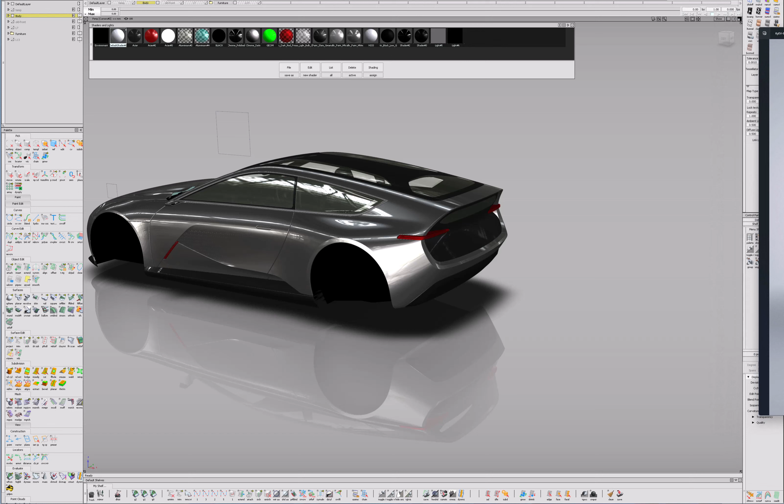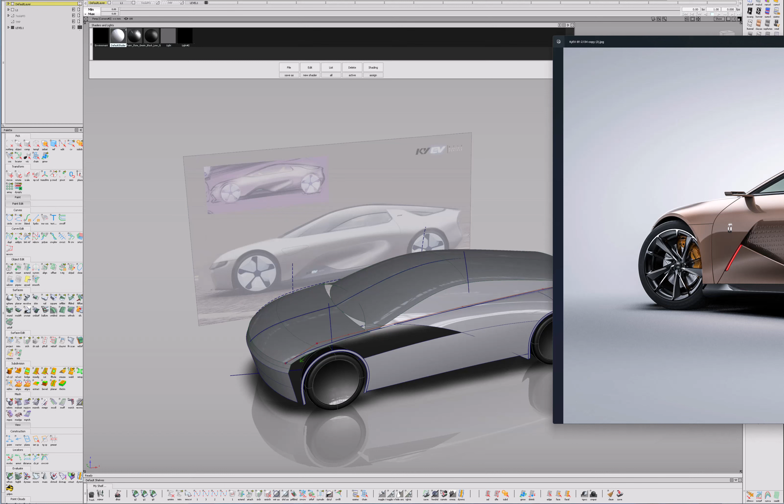Let me organize some stuff here.

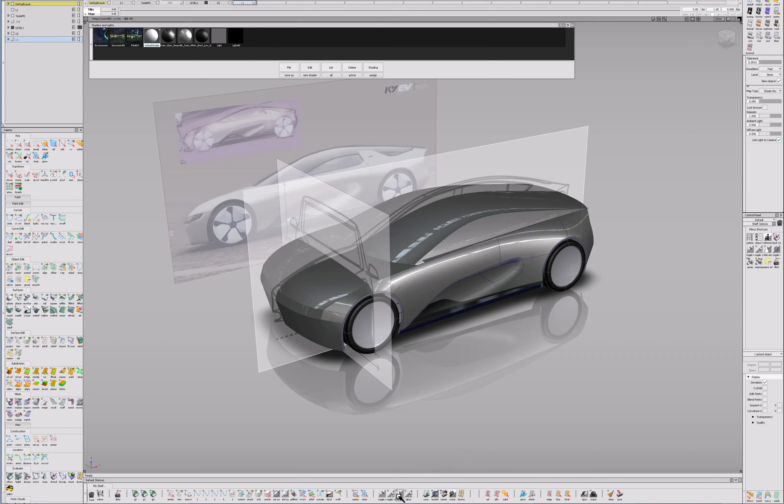Then, after this, a couple of steps to somehow catch the volume of this side and catch proportions. For proportions I just took the Tesla Model 3, I think it is, just for basic dimensions.

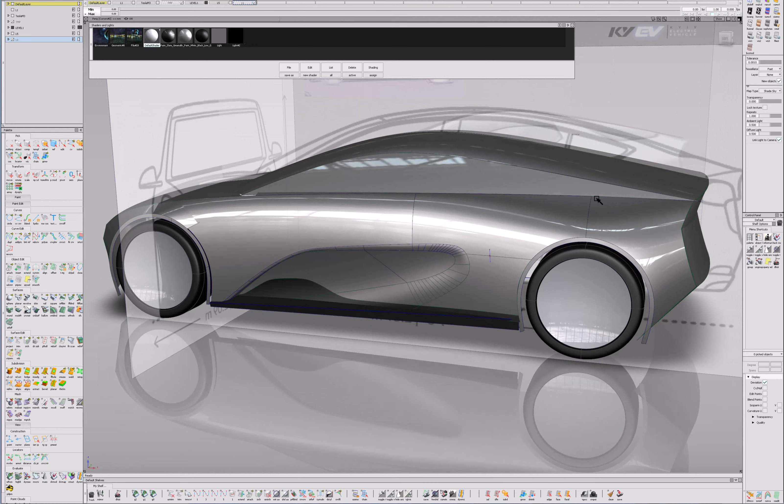Then I built this really rough volume, but as you can see, I tried to build up the highlights right away, to sculpt it even in this super simple form.

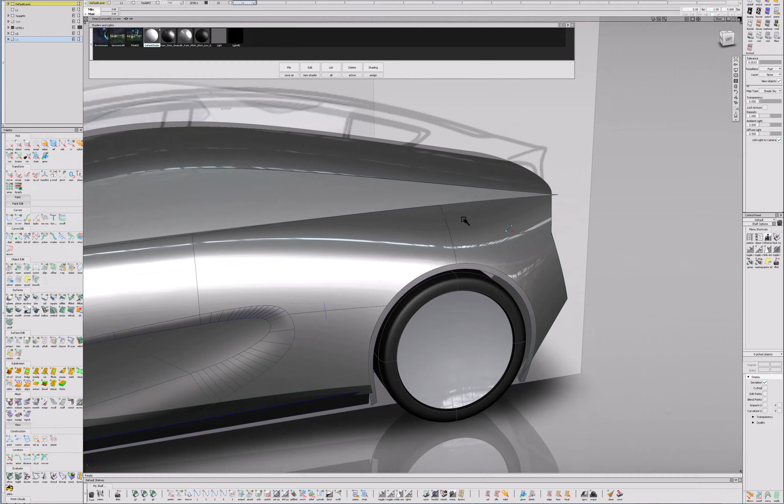This is my technique for this kind of really rough models. You don't need to build a lot on top of it to achieve this kind of volume, just sculpt CVs and the surface here, just to catch proportions and everything else.

Then we decided to change it to a more aggressive coupe look, and decided to use as a reference this Mazda concept.

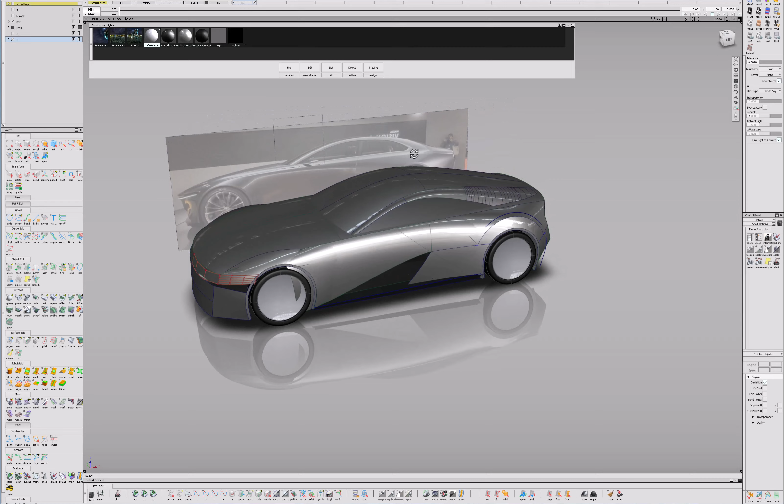As you can see, it had a different A-pillar touchdown and silhouette. The wheelbase stayed mostly the same because I scaled the reference photo to this wheelbase, but the A-pillar touchdown and the whole silhouette of the car was changed according to this sketch.

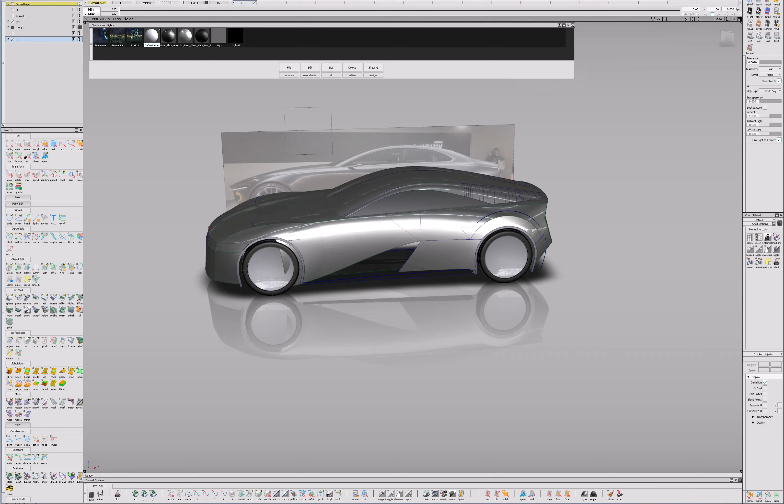Then there were small changes here, and I ended up with this model and sent it to our chat.

So at the beginning of this project there were three of us: Anton, who lived in Kiev at the time, Max Shkinder, who lived in London, and me, who lived in Zagreb, Croatia.

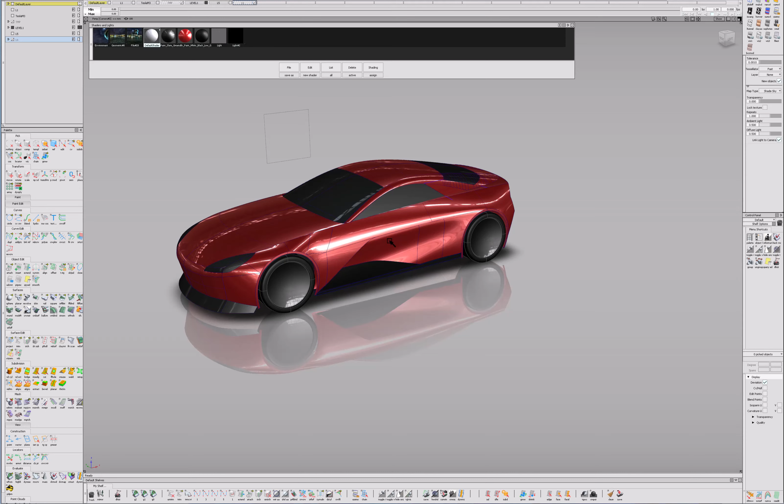When I ended up with this model, I sent it in our chat, and Anton and Max did a sketch on top of it.

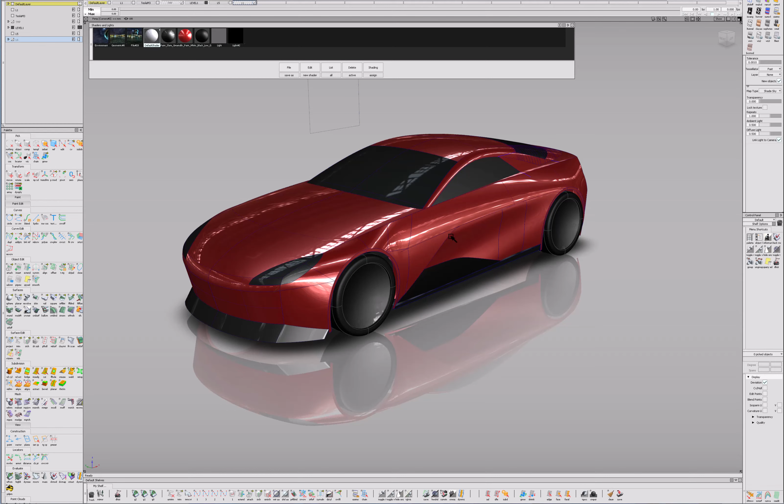You should understand, especially if you're new to this design process, that it's never one iteration. It's always so many tries - I wouldn't say errors, but so many tries - when you can see what's working and what doesn't, and you choose the best solution. It's never from the first touch, never.

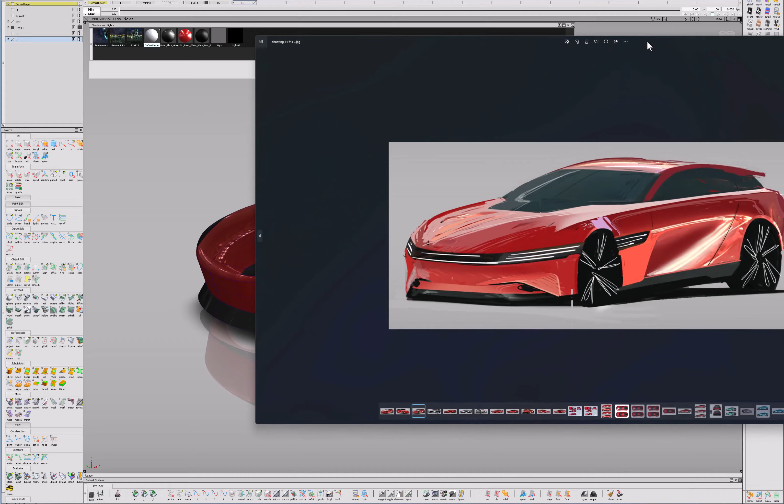Anton, on top of this one, did a lot of sketches. We took some ideas from these sketches, but basically this one we chose as the main theme.

It was done by Max. All this, as you can see by style, was done by Anton, and this one was done by Max Shkinder. This is, as you can see, my model.

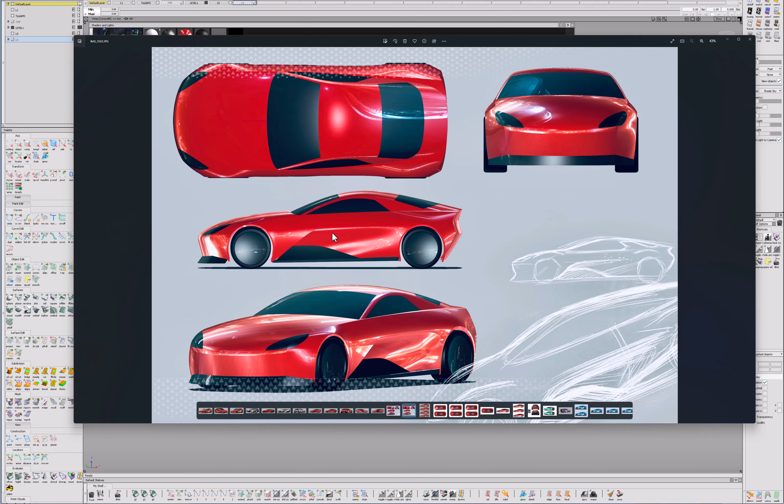This is the sketch. The task of this sketch is not only to show the design, as you can see here, but also to create it in orthographic views for me, for the modeler, so I can easily build my model on top of this.

So I can use it as a reference, as a blueprint, put it in Alias, and use it to sculpt and model. This is really a professional level of sketching.

Because really often when you communicate with a designer and expect some feedback, the designer might give you a sketch in perspective like this, without any orthographic views or lines or anything. And it's really hard to catch the right proportions or volume from perspective.

But when you get this kind of sketches, it's much easier. So we accepted this one as the main theme. We liked it a lot, all of us.

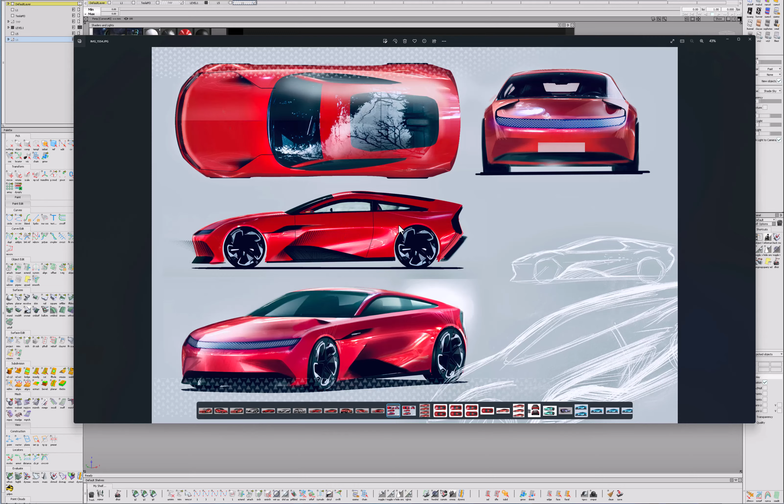All decisions were made by voting. There were three of us, so it was never even - it was easy to choose. We voted for this one and continued with this guy.

So this is the first tries to implement this sketch here.

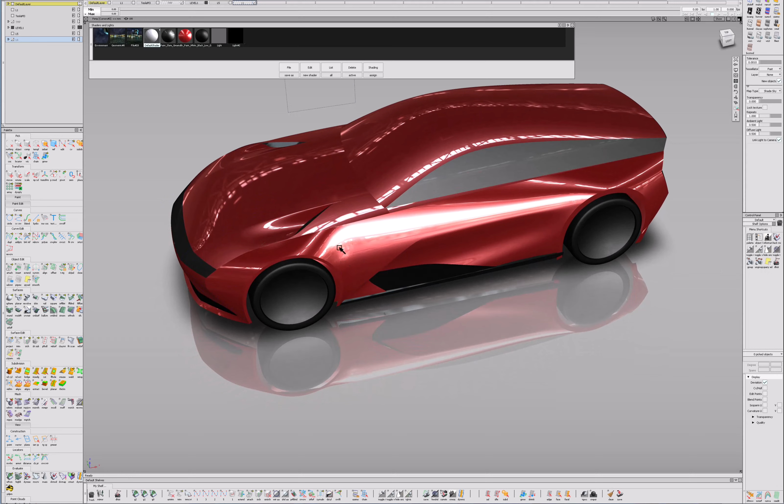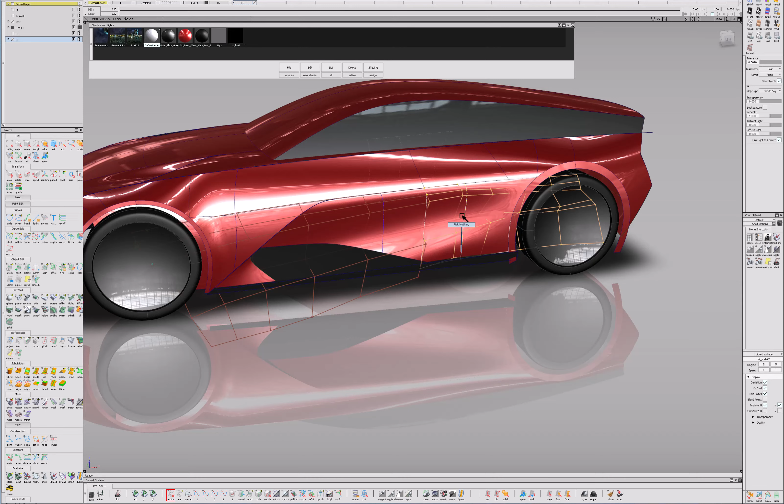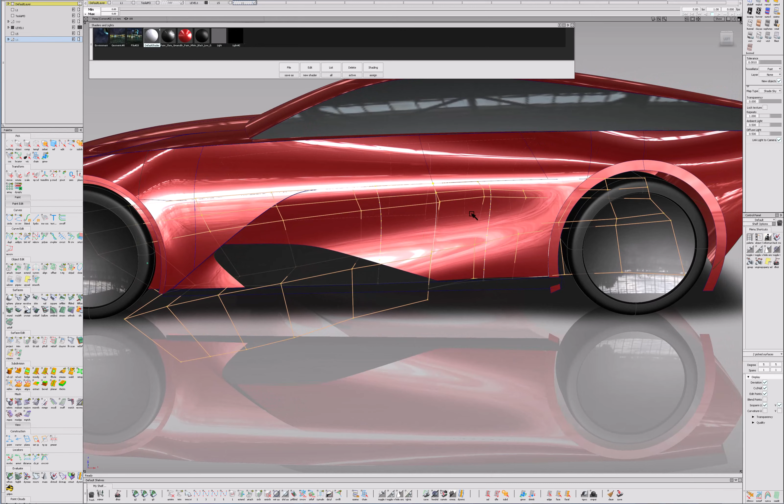I tried to build basic volumes, basic surfaces to blend up, to blend the wheel arches, to catch highlights. How I did this one, you can see it was pure sculpting. This is the blend between two surfaces. First one is simple, to align with wheel arch here. Try to catch this line by intersection, not by naked natural edge projection, but by intersection. And this crazy volume, basically, you see how I did it, just pure sculpting. Then after this, I did a lot of trim convert actions to clean it, to sculpt it back into one clean surface.

So as you can see at the end, here for example, at the very end, there are only two clean, nice surfaces without any blend, so they have curvature continuity between each other, and the touches on the wheel arch are really good.

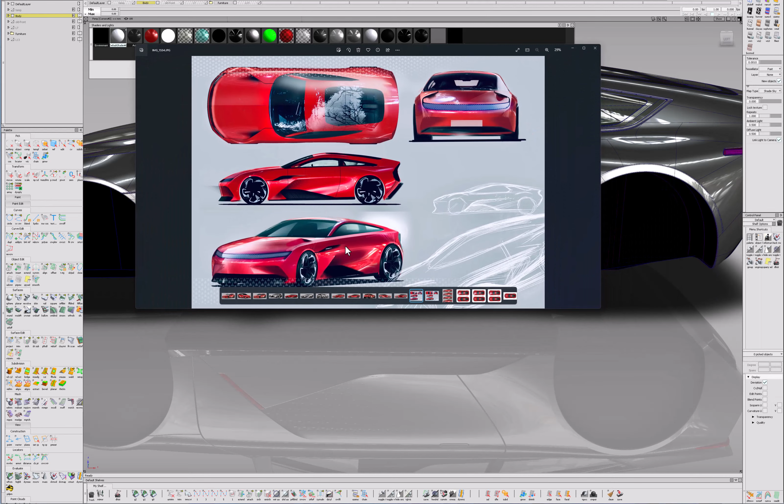Okay, we can go here. Next, we discuss a lot of things regarding the roof, as you can see, regarding C-pillar. There was a lot of discussion regarding taillights. You will see it later.

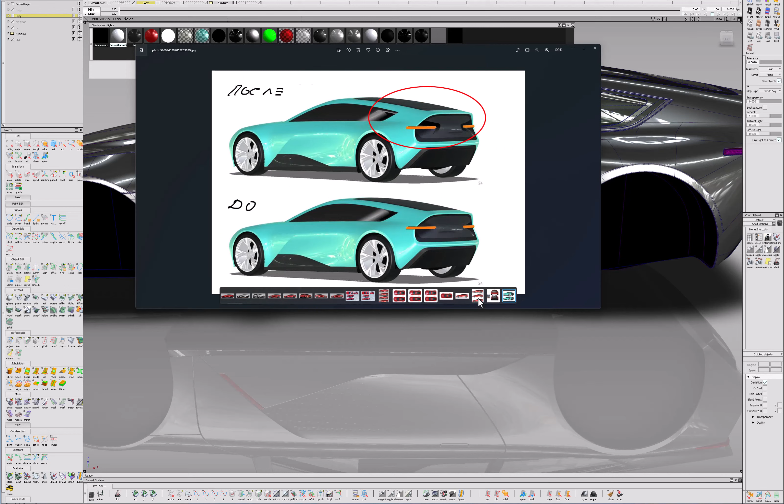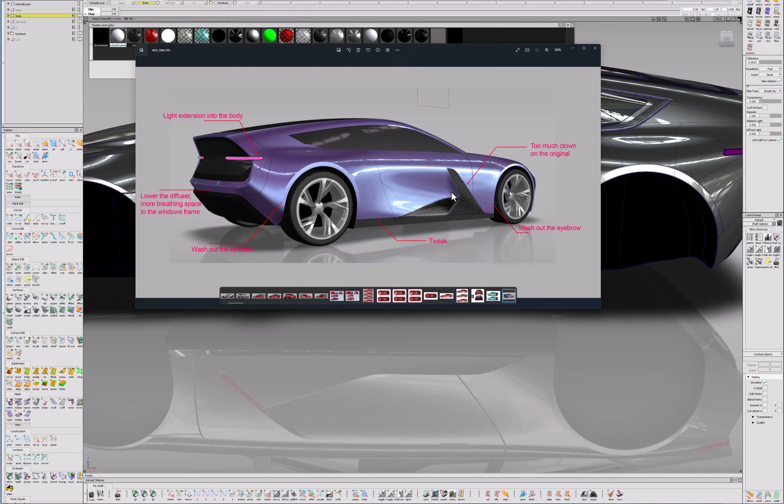Regarding the side, that was the biggest discussion, was regarding the side. We tried a lot of stuff, and it was very hard to model something fresh, something unique. There are so many cars out there with different volumes on the side, and everything obvious, it was done by someone already. So we tried a lot to catch something unusual and fresh and interesting, and something that will work here.

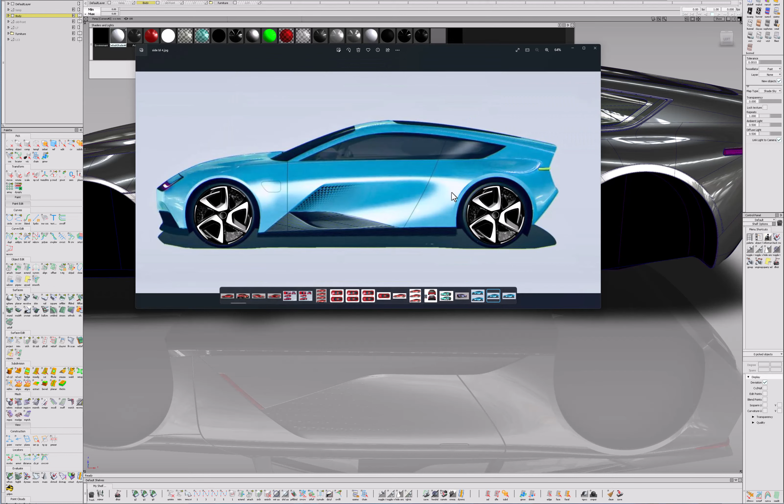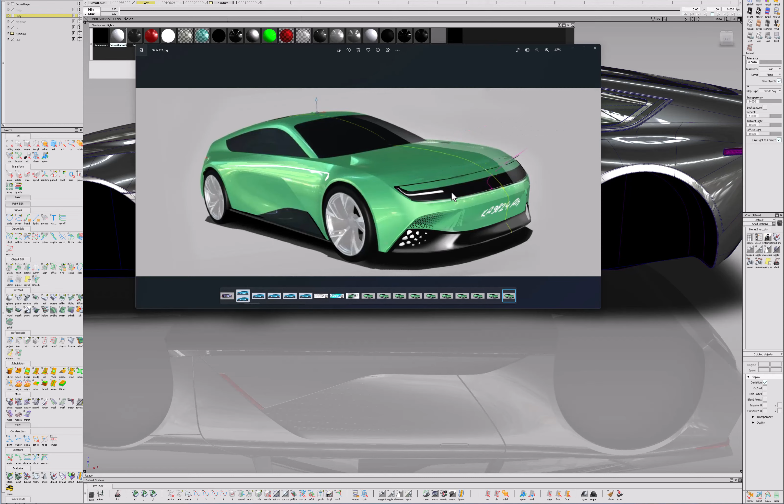So this is actually wheel disc iterations. This is concept for front light graphic. You see how many things we tried here before we start to model, and yeah, there's many cool things here.

More disc iterations. Okay, for discs, just to keep the model on the ground and to see stance and everything, usually I am downloading some basic stuff from GrabCAD and using it. I have not modeled these discs for the first time, but later, of course, when we finish the model and for final renders, of course we should make the original discs.

We did a lot of iterations on this, and finally we end up with what we have here. This was one of our tries, and we end up with this one, as you can see.

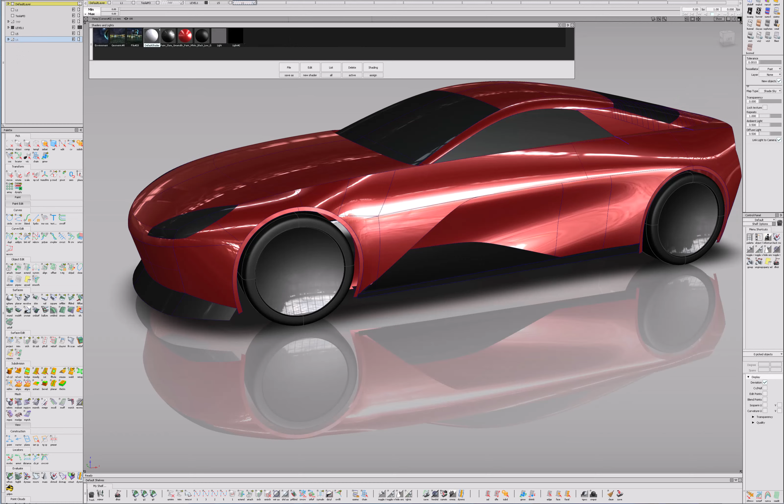And the whole time, this is my, how to say, not technique, but I love to do this when we're developing the project. I'm always changing the colors in Alias, always, as you can see. It's easy to see this, that every time the colors are different. It's because I like to feel and to see which colors suit this car more.

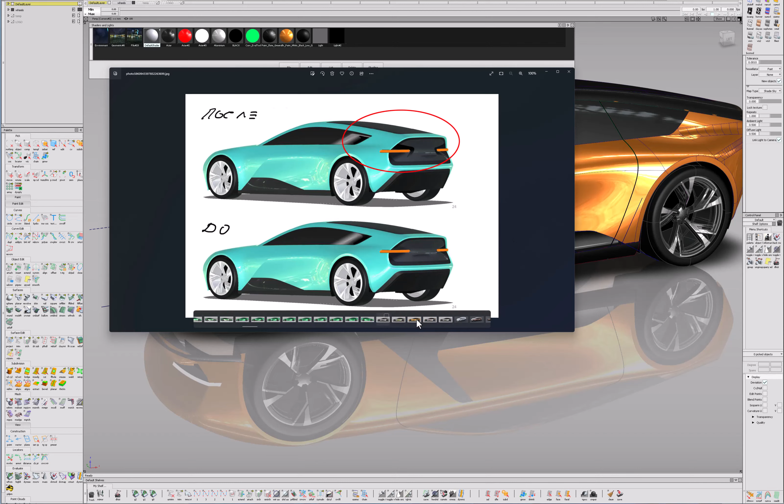And you can see from these renders also that I tried a lot. Let me show you. So it was gray, yellow, this bluish one. I like this one a lot also. I used it on my BMW.

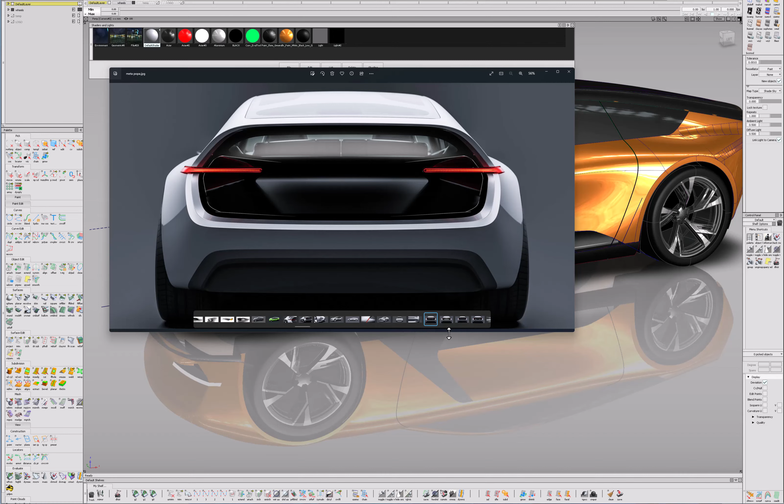And it's really hard, especially when you're doing post-production in Photoshop. With only one slide, you can ruin your color on the paint. I mean, not ruin, but change it. So, for example, this violet color—only a small slide in Photoshop changes it to blue or black or something. So what's hard is to be consistent, to keep it from render to render.

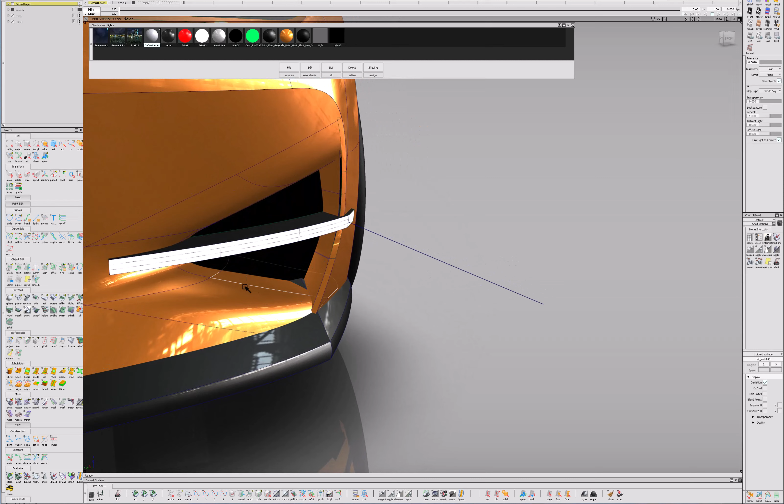So this is different front light variations and front bumper designs, and at the end we end up with this one. The hardest thing with this bumper was this transition from these guys to this edge, and from this big soft fillet, big soft volume, to this edge, from a modeling point of view. It was not hard from a design point of view, of course.

And what else? The crazy stuff was with this pattern. We tried a lot. We got rid of a lot of ideas just at the ideation stage, because no one knew how to implement this in 3D. And this is how the discussion was going.

And yeah, we tried a lot, and one of the options that we did with the pattern was, let me show you. Let me find this picture. So many of them.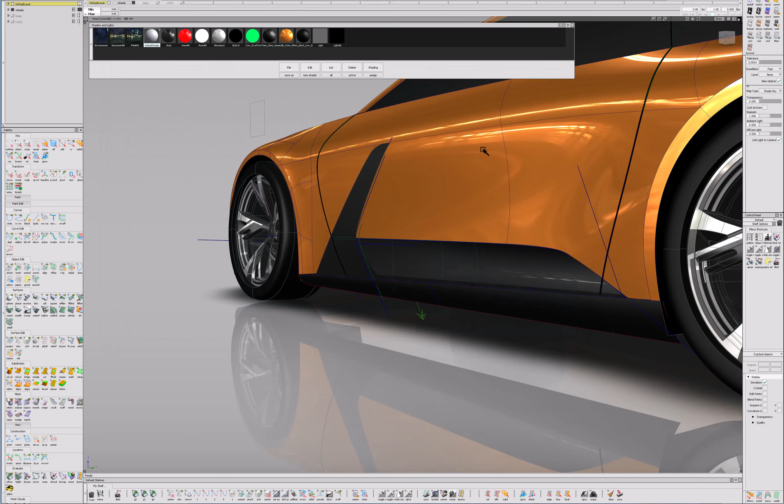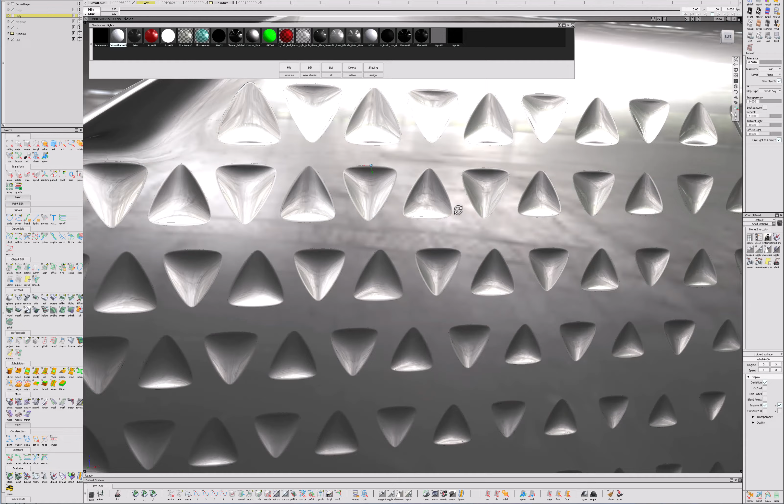And I came up with the idea—of course it was me, who else—with this treatment when it's not just a basic cutout or Boolean operation or extrusion, and it's actually a triangular shape of the surface that intersects with this triangle on the surface. So it creates this nice pattern here.

So I can quickly show you how I did this. Let me open the RHINO file. One second.

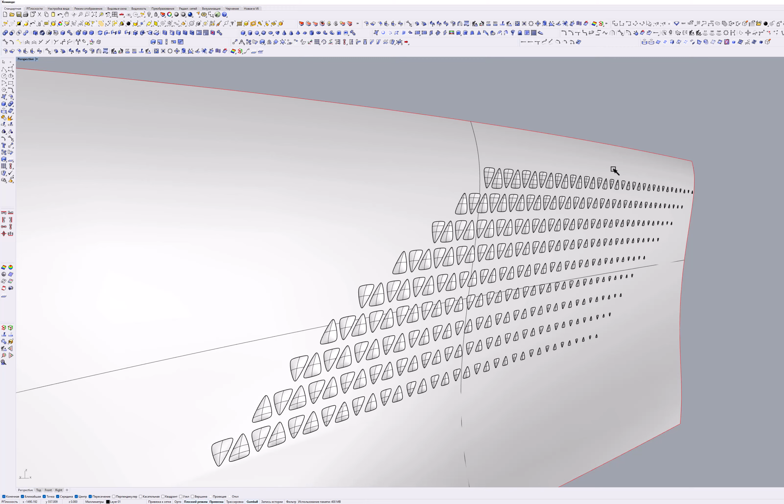So it was done in RHINO, because RHINO works really well with this kind of operations. The surface itself, the pattern, was done in Alias. Then I bring it here.

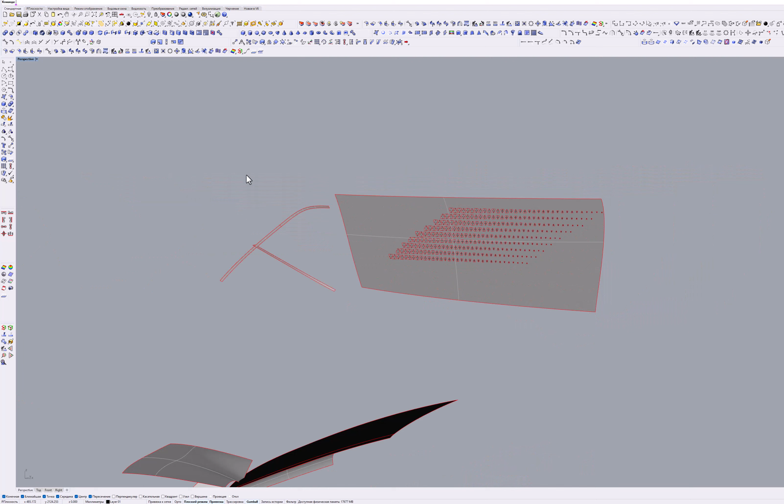I did it on a flat surface with this reference. See, this is our body side, this is our character line, and on top of it we have our pattern.

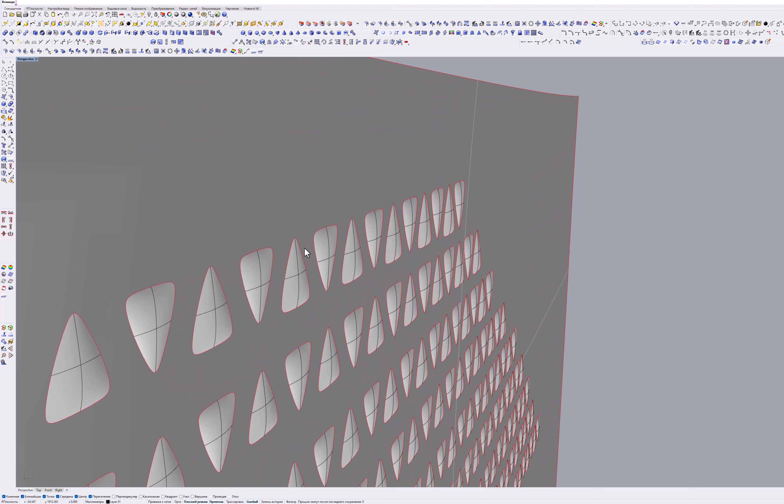So I did all these triangles and intersected them with the surface, trimmed them all on the flat surface first. This way I have more precision and a more controllable environment for my pattern.

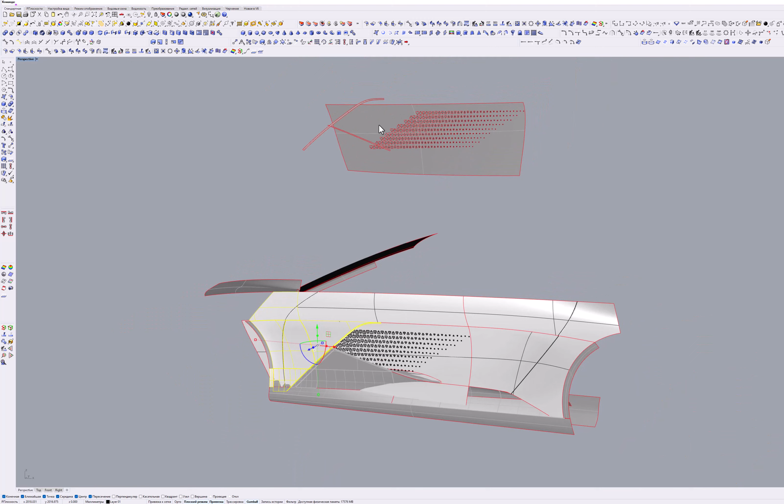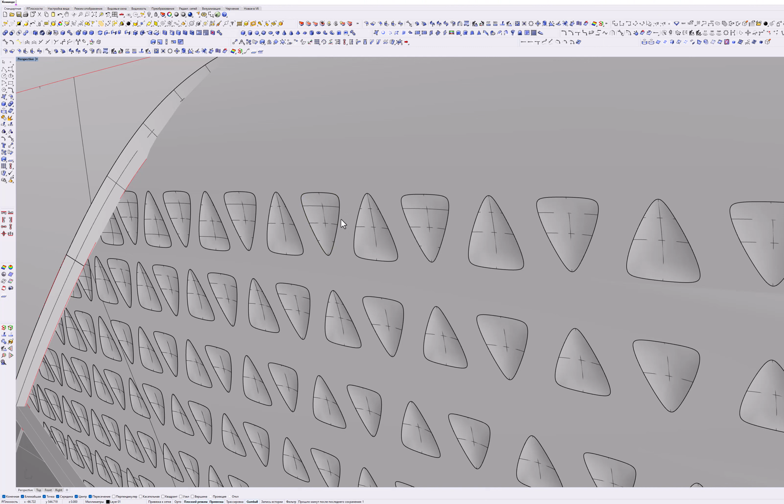And then I use this Flow tool to translate all these triangles to this bent surface, and it picks up all the coordinates from this surface and translates it here. As you can see, it adds spans here just to increase resolution of this surface to fit properly. So at the end you have really good tolerance here, and you can work later on putting in radius here or something else. See, you can go even more.

RHINO is really good with this kind of stuff, but not Alias, unfortunately, or I just don't know how to do it there. So yeah, this was done in RHINO, and it was done in a few stages.

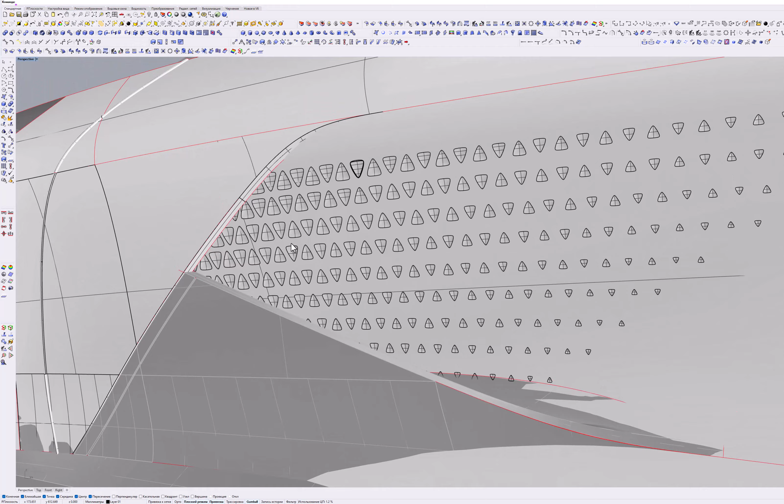This one was the first. Then I add the fillets here and here, and it was the second iteration to adapt this pattern to avoid this blend surface that goes inside there. So then it was remodeled again, and here also, as soon as I create these blends here, I had to remodel everything there.

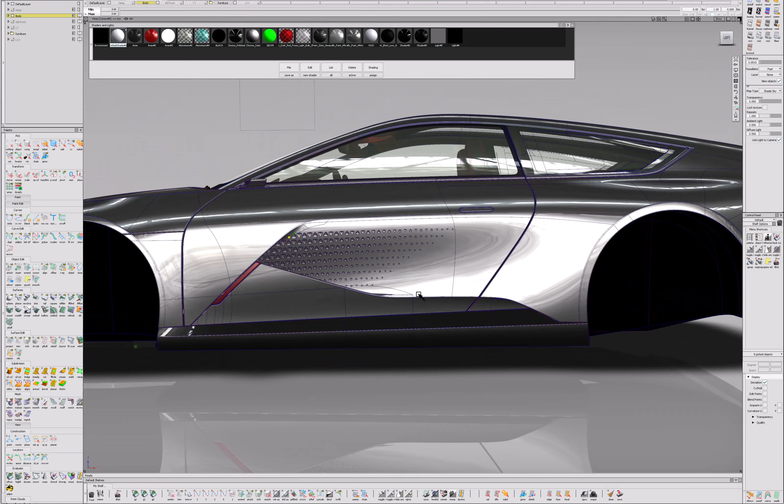Let's go maybe to the front. So we tried to put a pattern on the front also. This is how it looks. Let me show you quickly. We tried a lot of things there.

This was done in RHINO also, because to try this just on sketch, you will never understand how it works. I did these tries in RHINO. We tried to balance it with the volumes, this what we had, and nothing worked here. We tried different things, nothing worked, so we decided to keep it just a black thing with texture.

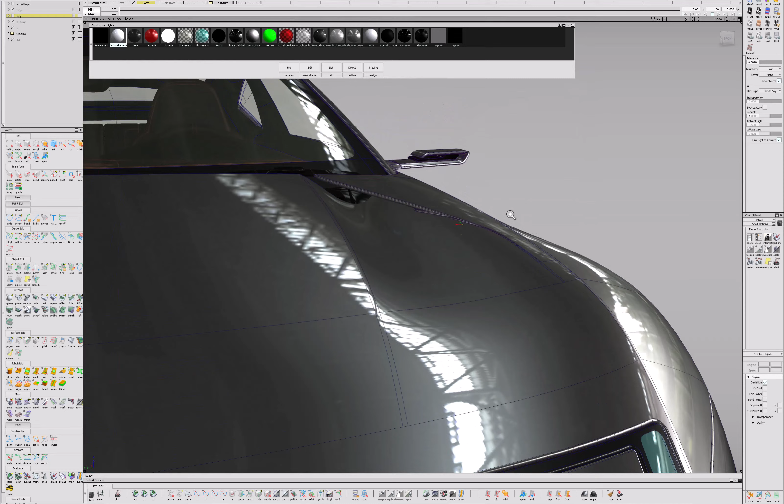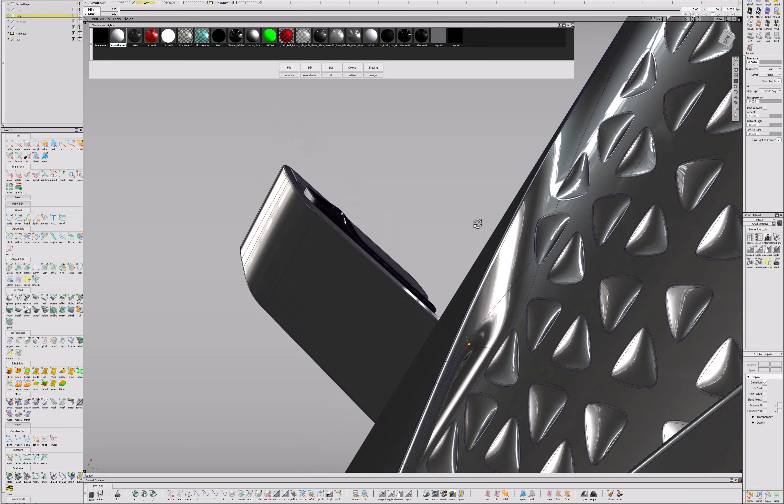What else was interesting here? Actually this one is interesting from my perspective, because it's not interesting, it was my lazy job here. There was a few ways to model this transition here. One way was, let's say, the right way, and hard at the same time, to make this nice, soft, clean transition that goes under there.

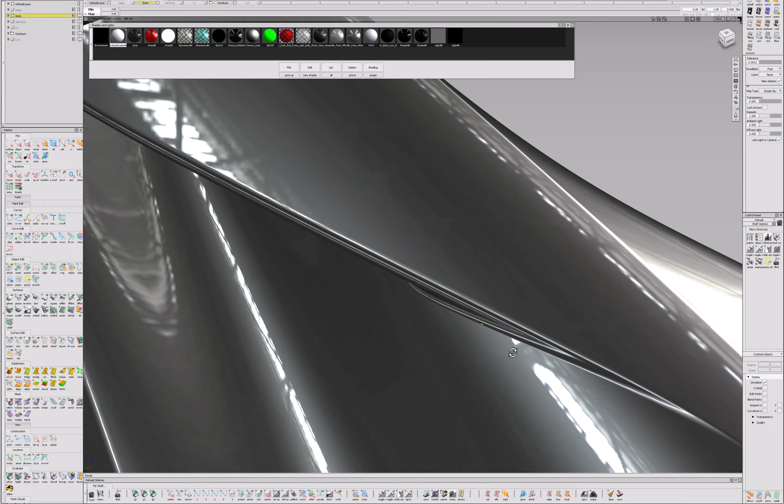And another one, the easy one, I just put this in CATIA, make this thickness here, and create radius there. It's so easy doing this, and it's even not curvature, it's tangent, but you will never notice it, because here I add curvature already. Here it's tangent, and somewhere here I have a transition to curvature, and it looks really nice, especially on renders.

Regarding the highlights here, I always try to keep in mind that it's not only lines, creases and silhouettes that should work as a design here. It's always volumes and highlights also.

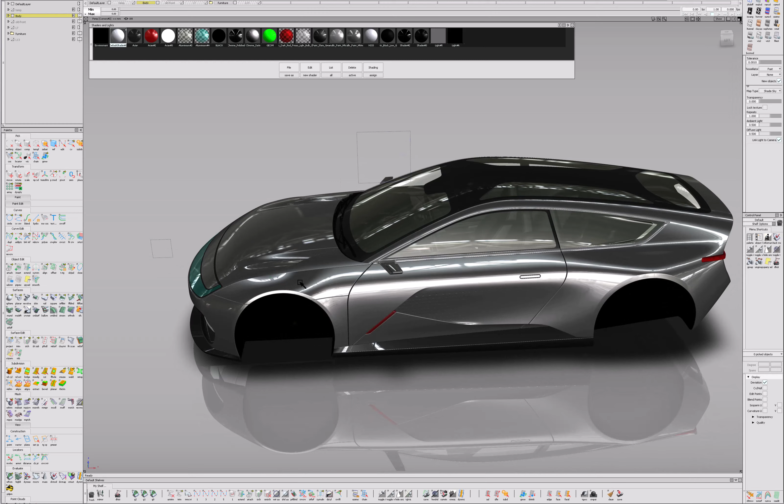So as you can see, the first iterations of the model, the highlights not following the edges of the shoulder. It really works good on the side crease, on the side character line, this volume, but not with the shoulder.

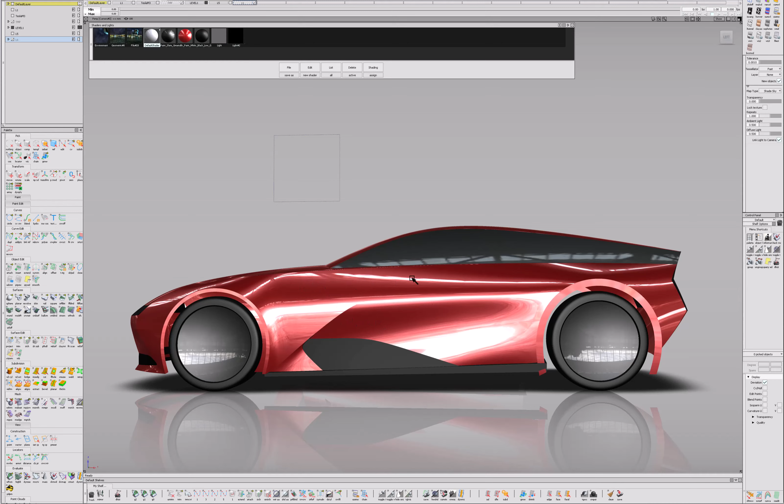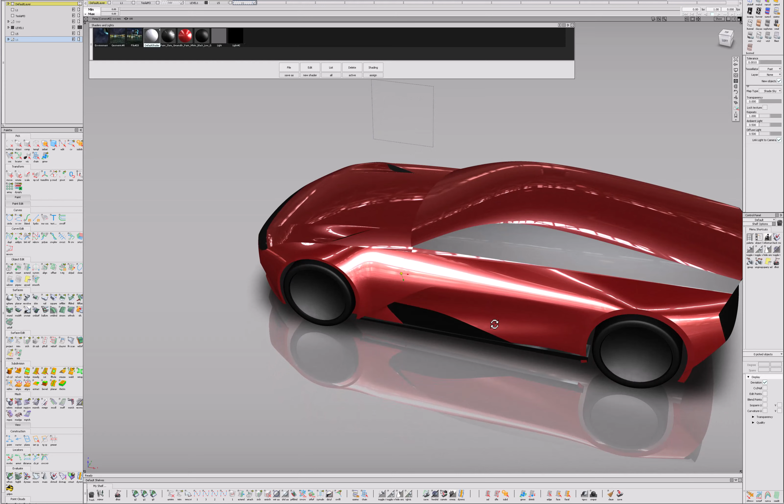And this volume, we used it a long time, and we thought it's okay like it is, and something was not okay. Only later I understood that all highlights here should follow the main lines, the character line, the shoulder line, the side line also.

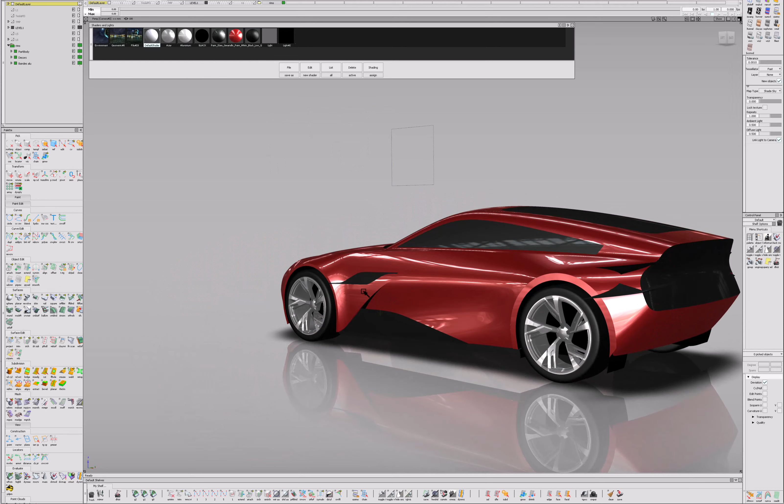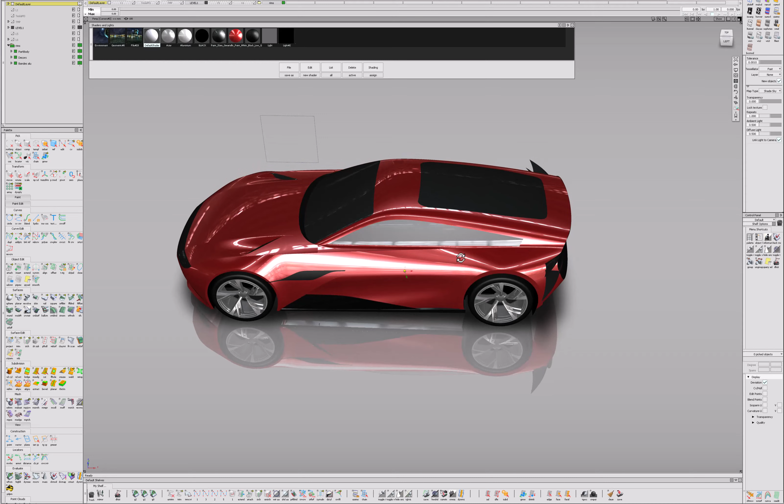And I ended up with this, you see, when we add more definition to the side, more of these tricky volumes here, somehow this good transition with the wheel arch, nice and clean, somehow your laziness tells you it's okay to keep it. More or less the side surface is good, it's clean, the highlight is straight, it's not waving, not waving anywhere, so you can keep it.

But at the end I decided to fix it, and you see I received at the time the corrections from Anton, who changed the silhouettes, who changed the section of the rear, etc., etc.

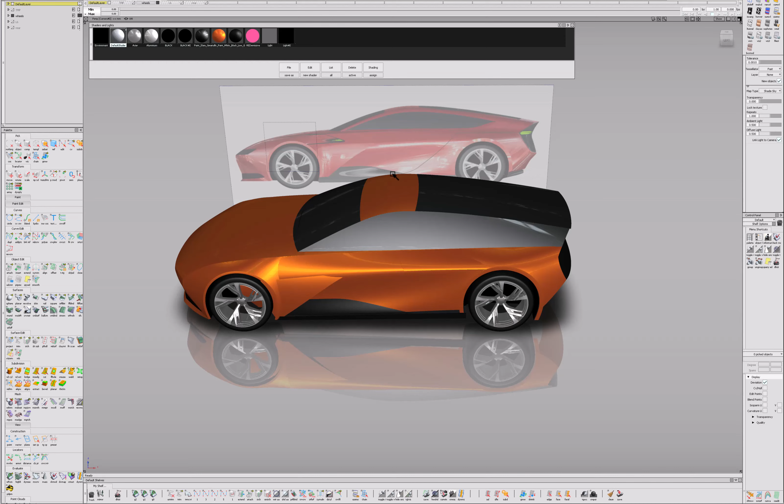So I should remodel it anyway, and I decided to straighten these highlights. And as you can see, because of this, I lose some speed of the highlights here on the rear wheel arch.

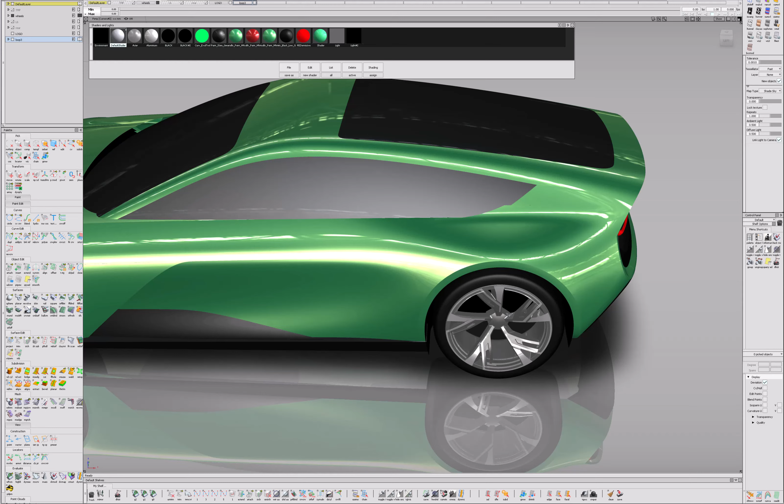It's always a question of how good you are controlling your volumes. Can you change it to what you want? And I wanted to change the speed of the highlight to make it more fast, to make this point more sharp. So at the end, as you can see, we end up with a highlight that is faster than the previous one.

And in modeling, you always have areas where you can't control it fully, and then it's a matter of the designer or design to dictate how it should work. Should this highlight be fast, or should it be slow? How should it behave? And sometimes some areas you really can't control, and it's not only volume with highlights, but sometimes you just have an engineering package that you should avoid, and you have nothing to propose in this situation.

So yeah, and sometimes I had a lot of, not a lot, but a few cases when my laziness and my stubbornness, let's say, kept me from seeing that it's actually possible.

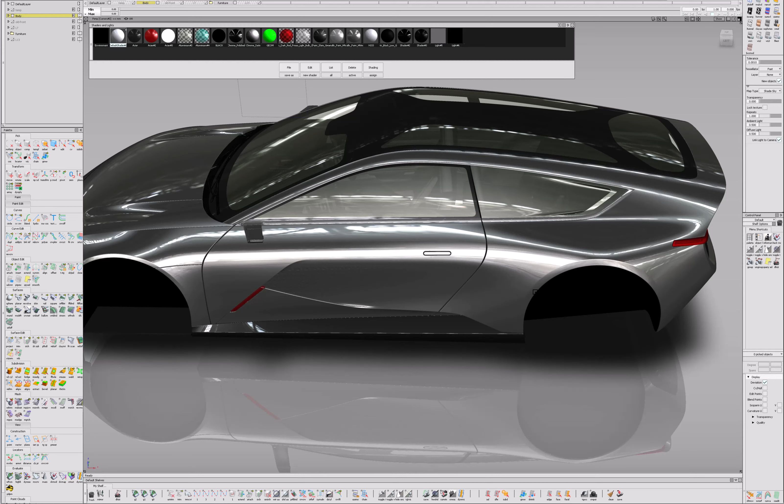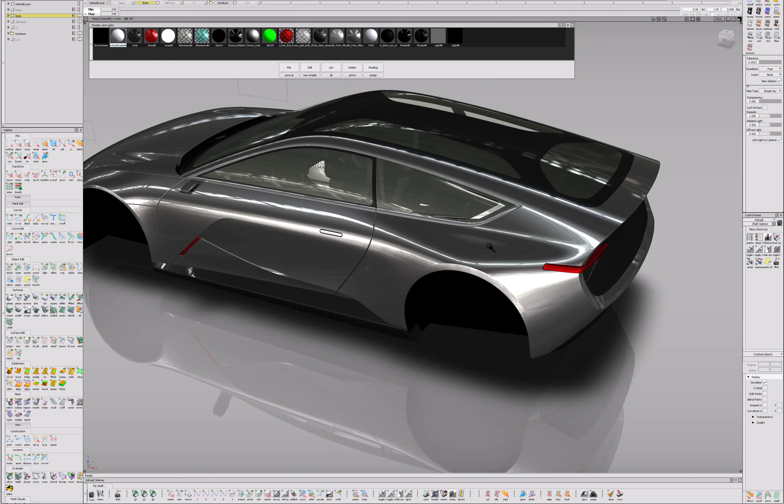Okay, so one thing I mentioned is that the highlight on the rear wheel arch should also have design in it. It should be under your control. This highlight should behave as you want, not just happen because you put a blend in it and it's like it is. You should sculpt it until you achieve the highlight that you want.

And my personal view on this, I like symmetry along the axis of the wheel, when the highlight goes into the wheel arch and goes out with symmetry. You can see this triangle here. Here it's different, just because of the volume, and here I didn't achieve this speed.

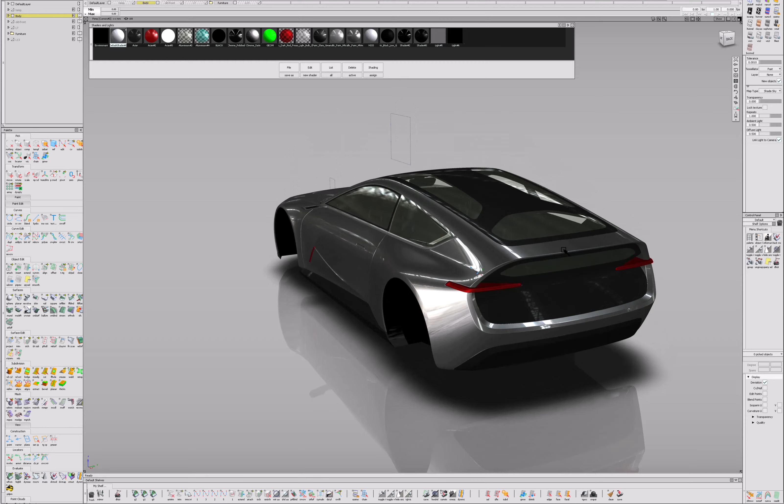And yeah, this is the biggest question I'm asking myself: should I have made this highlight speedy also or not? I like this one, how it works now, but I think I can make it faster and faster like this. And I'm always asking myself, should I have done this before? But anyway, yeah.

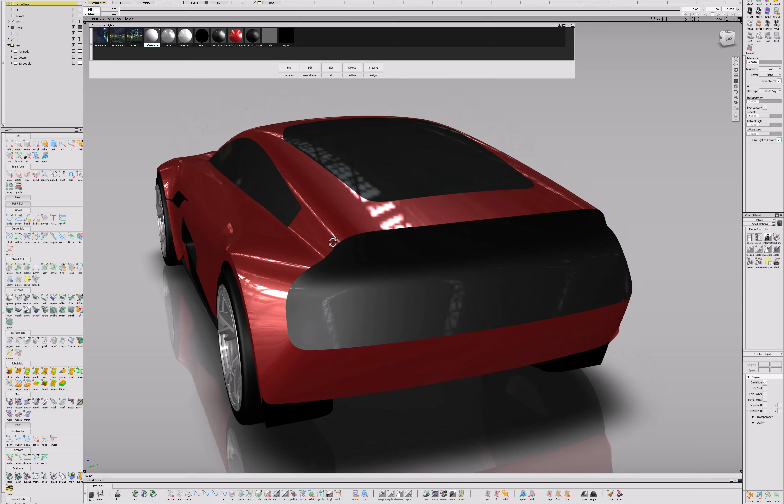And one more thing here is this silhouette, this edge of the rear. So as you can see, before it was obvious that the shoulder and the rear wheel arch has its own volume, and the C-pillar has its volume with the roof, and the transition from the C-pillar to the rear wheel arch has this negative surface.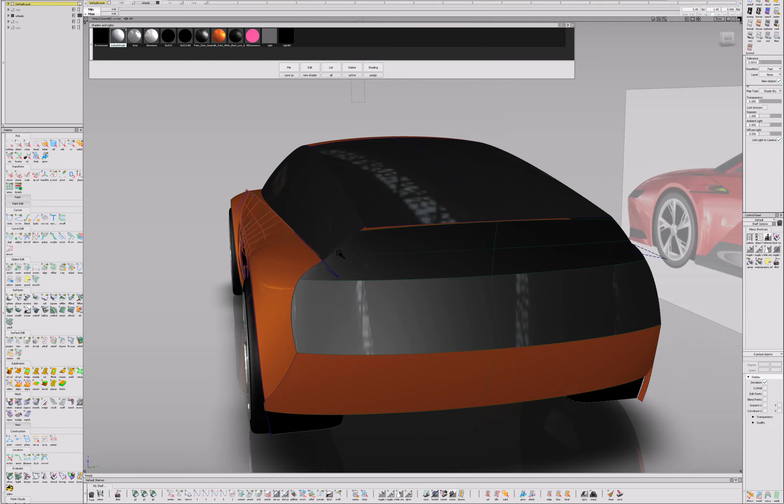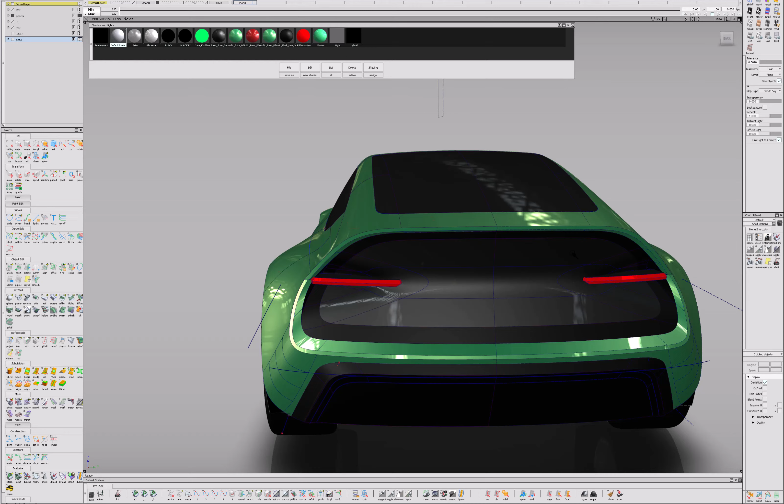Okay, let me show you more images. I will quickly show you the wheels, and all these iterations we did, we tried, we discussed.

Wheels are almost always not as interesting as the car itself, but you always need to do the wheels also. Somehow it's a must do. Only on some projects can you take, like if you model, for example, some Porsche, you can take a Porsche disc and don't bother with it.

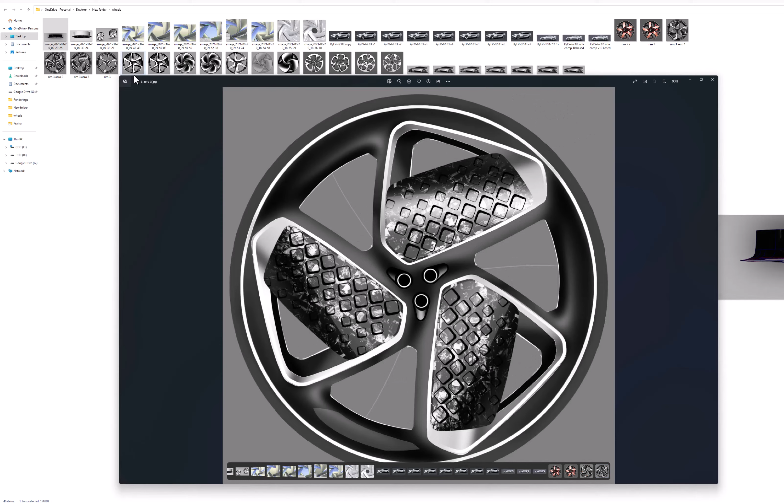So there were so many design proposals done just to find some cool solutions here. What else? Tail light. There were a few designs, and we ended up with this.

We end up with this solution, but also try to define it even more, not just a simple line, simple curve, or simple surface. And yeah, rear lights was done in Rhino also.

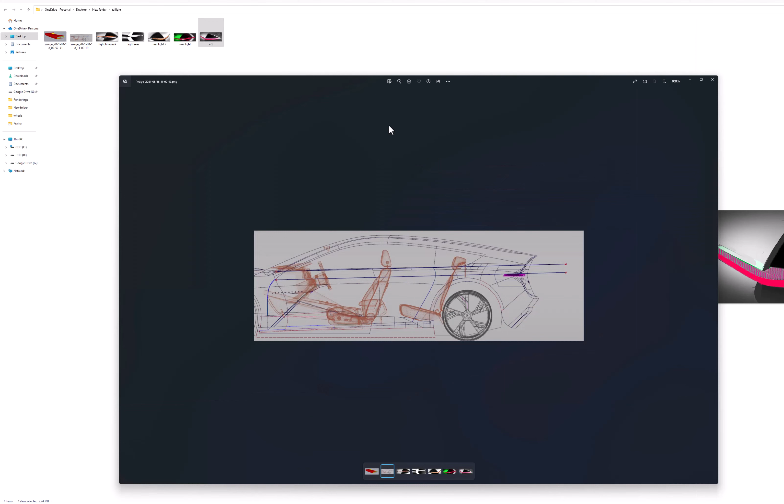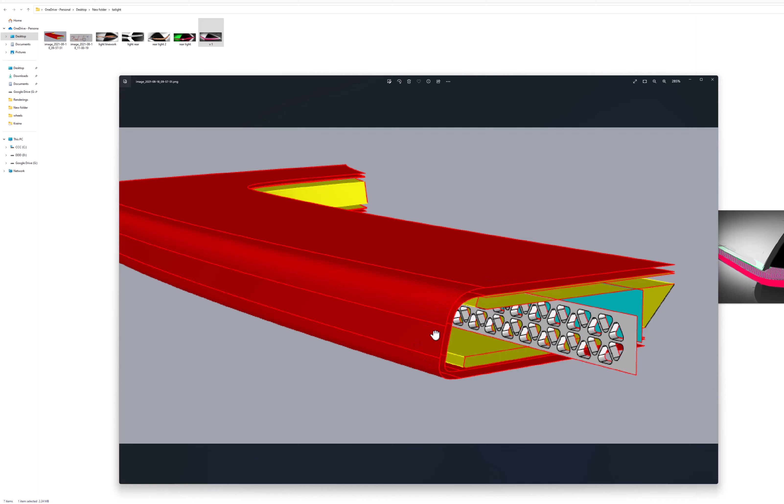This is the architecture of it. So when I'm doing the lights, I'm always thinking in terms of render, because the main purpose of this model was render at the first place. So you always should think how it will look on the render. What you want to achieve from the rear light, from any light, is depth. For this you should build this depth, the volume inside, the thicknesses of the housing, the thickness of the housing glass, let's say.

It's not required to model the light source, because texture is almost always enough. You should see how you can achieve more definition, more detailing in this design by adding textures, not the geometry.

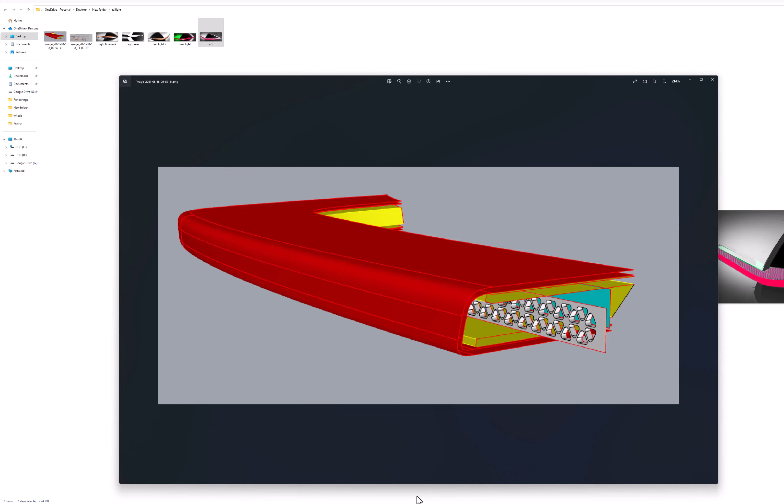Sometimes textures don't work. For example, if I would take this stripe and just put transparency, you will never see the thickness of these walls. Transparency doesn't work like this. So this one I had to model just to achieve the thickness here, but it makes the difference at the end.

It really works, so I can show you the result with this one. Not actually really good, this one also. I will show you the rear one later. This one also works good. Here you can see I add only the bump stripes, and it already works as if this plastic has thickness and everything.

Okay, let me find the rear in a good shape. No, this one, no, I saw it somewhere, but anyway, I think this one for now is the best. Maybe this. No.

Yeah, see? You see the light source there, you see how it works. I add again a texture of the small bump on top of the chrome inside the glass, and it gives these super cool reflections on the glass here. It's a lot of things you can do with textures, not geometry, so you shouldn't actually model it. The thickness of the glass gives you these highlights on the render, these depths, when you can read the thickness of the glass.

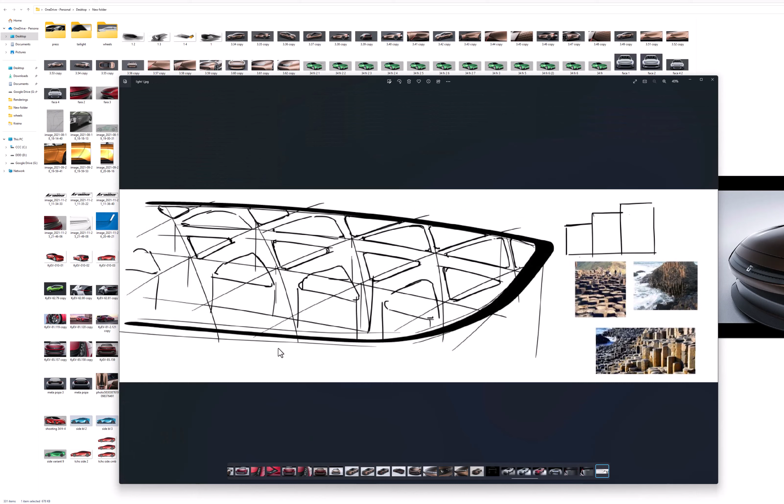I don't know what to say more. Yeah, you see, I even tried to model it. So this light element shoots on the mirror, then from the mirror goes to the lens and goes back. I thought there would be some views where I can actually catch this detailing on the camera, but there was no space for it. I tried to make this package work here, but anyway, sometimes it just doesn't work.

Okay, what else can I show you? Let me... I don't know, I think that's it.